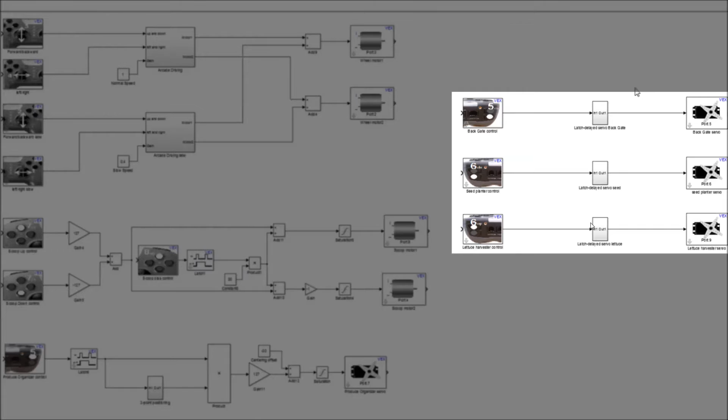One for the driving section, which allows us to move the robot left, right, forward, and backwards. We have the scoop subsection that allows us to move our scoop up and down and harvest different crops. We have our produce organizer that allows us to organize the lettuce and tomatoes before they go into the produce stand. And we have our individual different servos that operate the back gate, the seed planter, and the lettuce harvester.

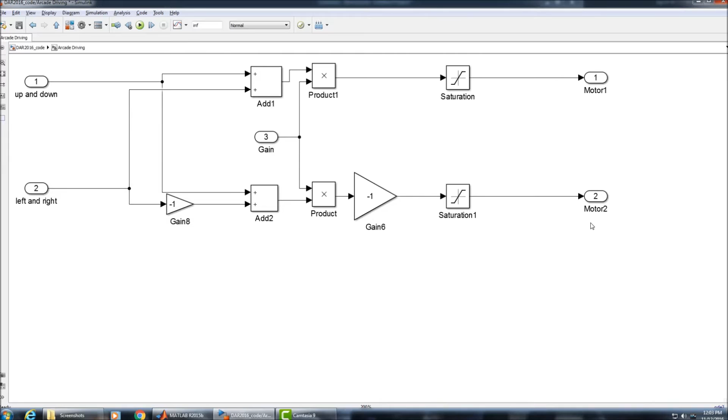This is our driving section. It allows us to maneuver the robot around the field. We use the joysticks to move the motors. The left joystick is for full speed and the right is for precision. We reuse the same code for each joystick but applied a different constant. Within the arcade driving component is the mixing of the signals. The motors are mounted in opposite directions, so we use a negative gain on one to make sure that they move together. Moving the joystick side to side makes the robot turn.

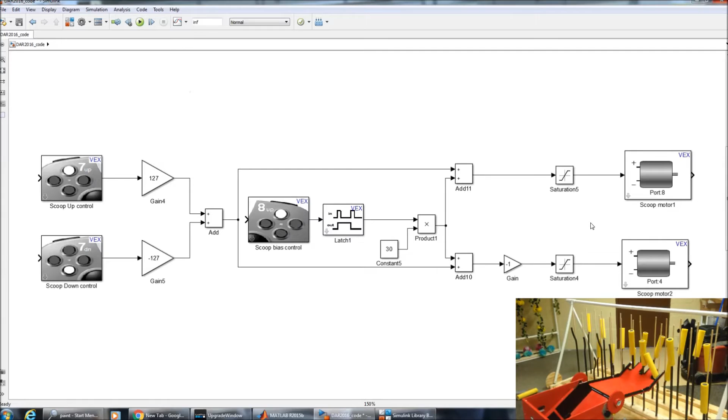7 up and 7 down control the scoop. We also added an 8 up button to counteract gravity. When 8 up is pushed, the motors are biased by 30 to keep the scoop from falling. At the end is a gain of -1 for one of the motors. This is because the motors are mounted in opposite directions.

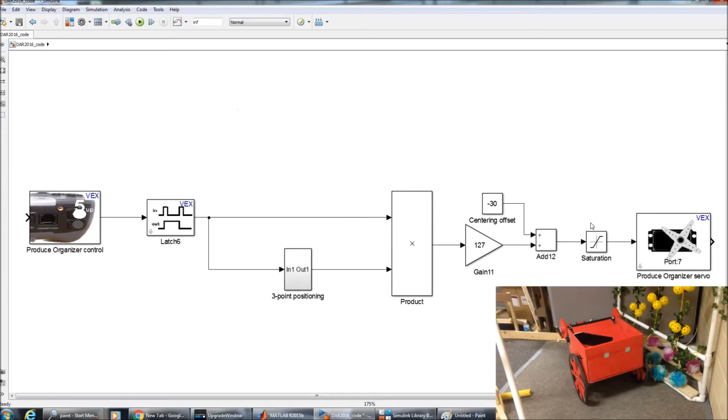The produce organizer is used to keep the lettuce and tomatoes separate so that they can be placed in the proper sides of the produce stand. The organizer has 3 positions. Every time the 5 up button is pushed, the servo motors move to the next position. The latch keeps the servo in the desired position without holding the button down. The 3-point positioning component uses a second latch to change the direction of motion every 2 button presses.

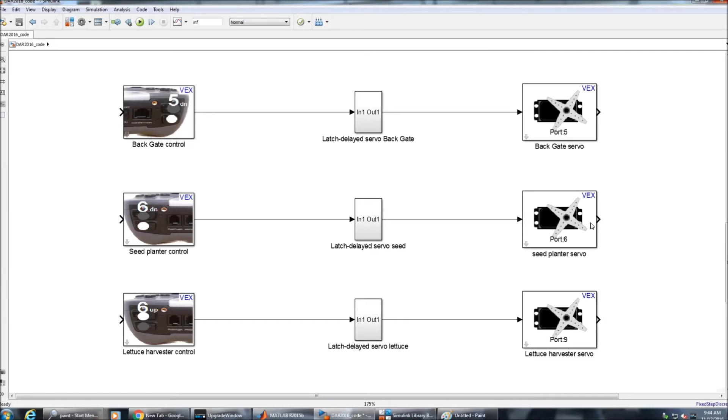The final section of code is the latch delayed servos. They control the back gate, seed planter, and lettuce harvester. Each time the button is pushed, the servo swings to the opposite side. This allows for a full 120 degrees of motion with the servos. We use this component for each servo because they all perform the same motion, even if they operate different functions.

For example, the back gate opens and closes so we can transport corn, the seed planter allows us to plant the seed pods into their respective holes, and the lettuce harvester allows us to obtain and plant lettuce into the produce bin.